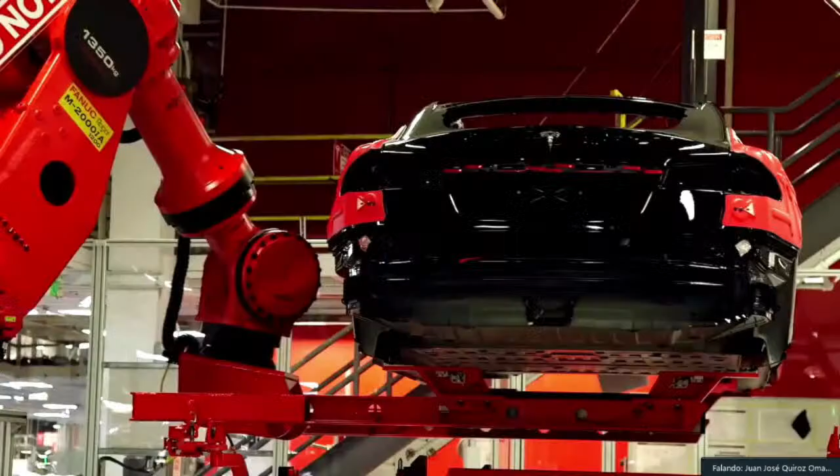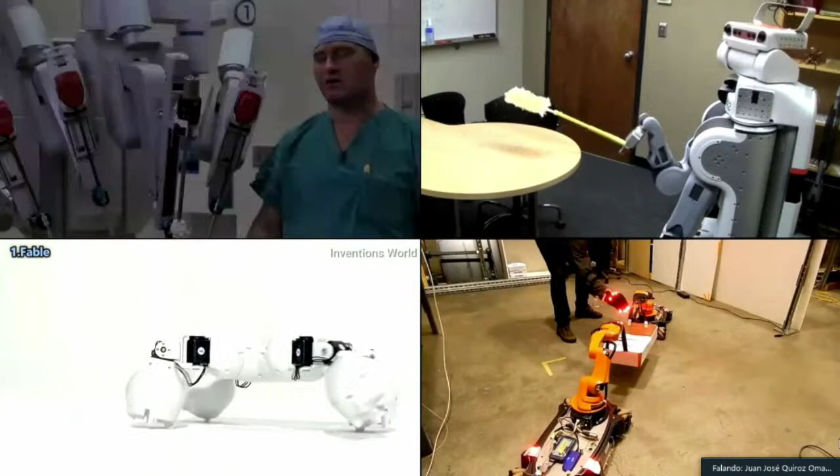Industrial robots have been one of the main focuses of robotics, historically speaking. In these environments, tasks are often repetitive in controlled spaces. However, in recent decades, the field of robotics has experienced great growth in various fields of knowledge. New applications have emerged in educational and medical fields, also in collaborative applications and home environments.

This new paradigm brought new challenges and robots like humanoid robots, which are designed to perform manipulation in human environments. They often have a large number of degrees of freedom, which allows them to increase their dexterity and possibility of movement.

To control humanoid robots it is required to make contacts with the environment sequentially under several constraints, such as maintaining the robot balance, preventing violation of the joint limits, avoiding collisions with the environment, etc.

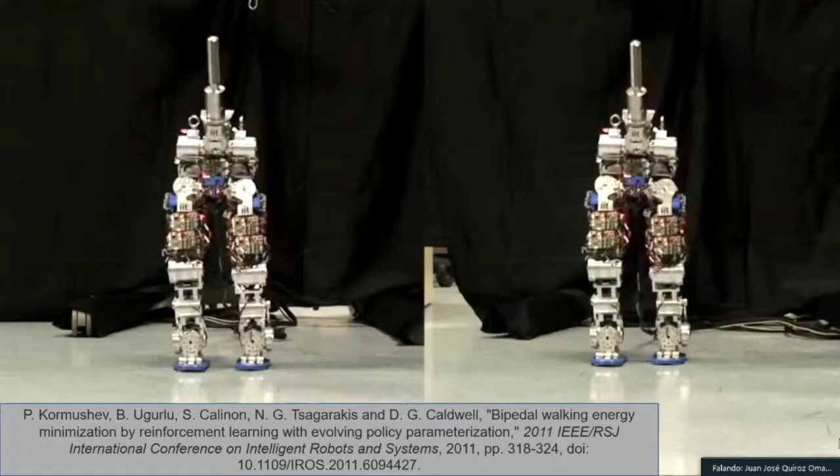These contacts can be cyclic or acyclic depending on whether they are periodic or not. Cyclic contacts have been used mainly for gait tasks and known environments where contacts are made on flat or slightly uneven surfaces.

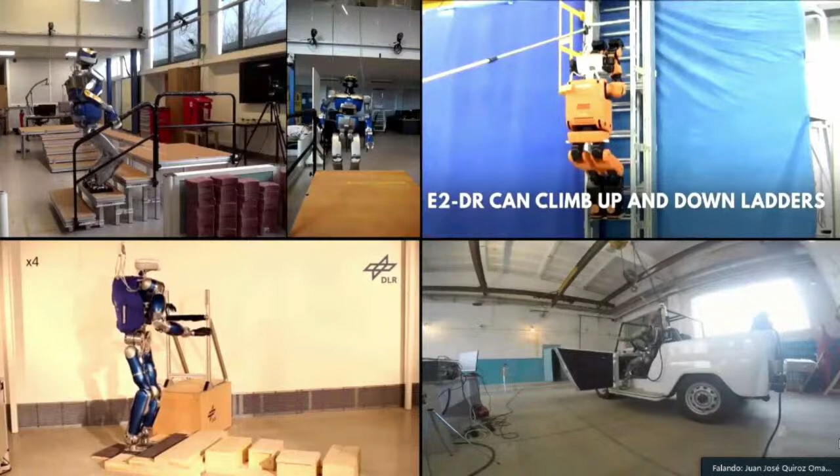Aiming to perform more sophisticated tasks in cluttered environments or to increase the robot's reachability, multi-contact control has been gaining the attention of researchers in recent years. In this paradigm, acyclic contacts are more suitable as they allow for richer movement options according to the environment.

The objective of this PhD dissertation is to develop whole body motion control strategies for humanoid robots with self-collision avoidance and using multi-contacts with the environment.

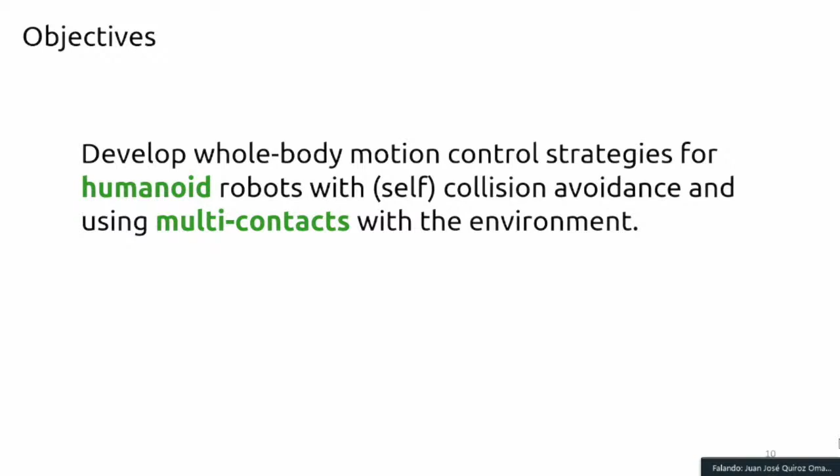Multi-contacts can be useful to perform manipulation tasks. For instance, consider a humanoid robot trying to grab a cup. The robot must keep the projection of its center of mass inside the support polygon in order to ensure robot balance. In this case, the robot's reachability is limited and the robot fails.

Alternatively, the robot can perform a contact with the table, which increases the support polygon and allows the fulfillment of the task. The specific objectives are the following.

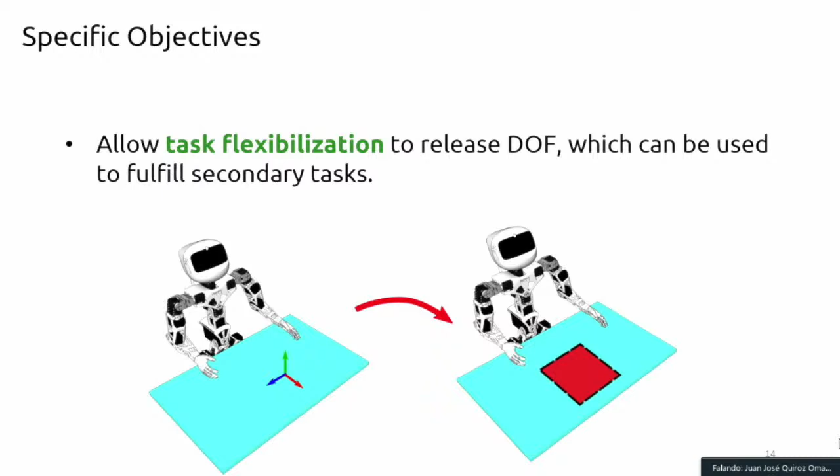Define a suitable objective function in order to perform whole body control at second-order kinematics. Develop suitable constraints in order to ensure self-collision avoidance. Allow task flexibilization to release degrees of freedom, which can be used to fulfill secondary tasks. Develop suitable constraints to perform multi-contact applications and general manipulation tasks.

Exploit the vector fields inequality framework to impose constraints to ensure balance tasks and contact forces with other robot parts, namely the hands. And finally, validate the proposed techniques on simulation and on the real platform available in our research group, MACRO.

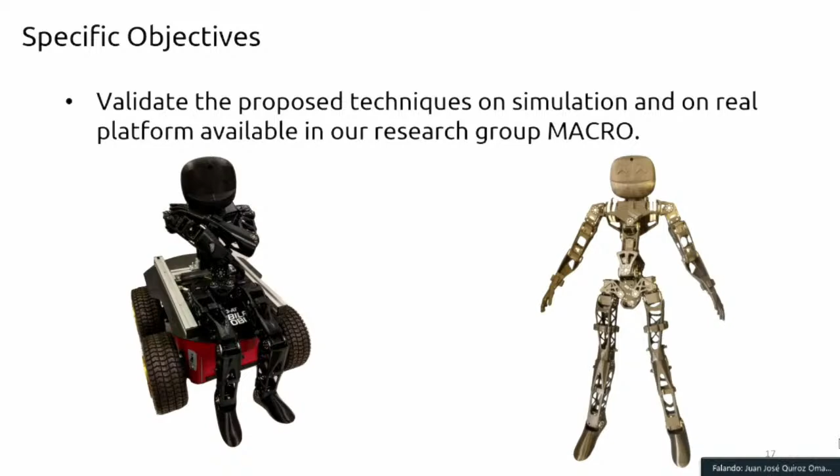The acyclic contact planning paradigm requires computing the robot base trajectory, planning a sequence of configurations that respect the set of constraints along the base trajectory, and interpolating a continuous motion between two configurations. However, dealing with those problems at the same time can lead to a combinatorial explosion.

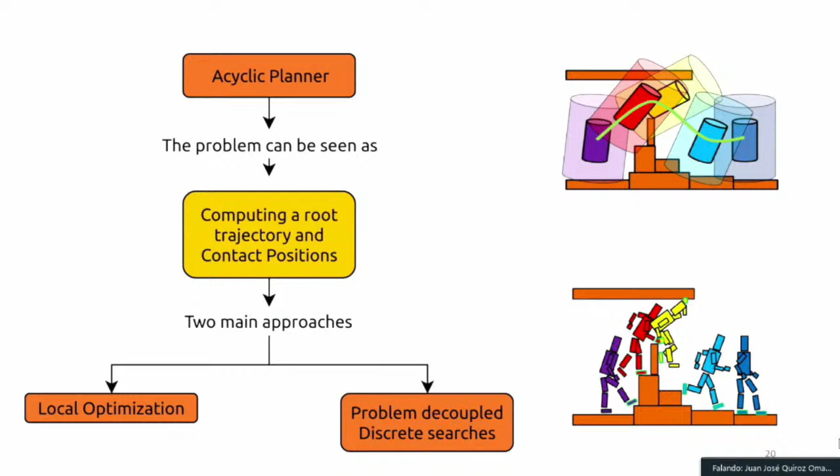This problem has been addressed basically in two ways: using discrete searches, which usually are based on probabilistic algorithms and aim for global convergence at the expense of higher computational costs. To mitigate this, local optimization has been used to reduce computation costs, but at the expense of local convergence.

Some works used optimization strategies to perform acyclic motions. Mordatch et al. proposed the contact invariant optimization method to perform simultaneous optimization of the contacts and task motions.

Lengagne et al. addressed the dynamic multi-contact motion generation by using nonlinear optimization and considering the full body dynamic model. Unlike the Mordatch work, this method requires the desired contact sequence.

Saab et al. used hierarchical quadratic programming to handle dynamic motion under unilateral constraints. The authors proposed a reduced formulation for rigid planar contacts.

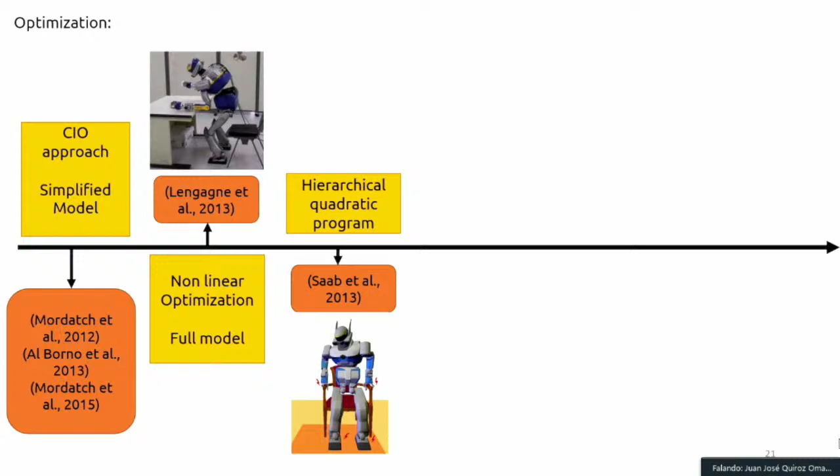Chung and Khatib addressed multi-contact locomotion using the elastic strips framework. A global planner searches a sequence of contact regions based on the robot's reachability. After that, a prioritized controller simultaneously adjusts the poses and the contact regions.

Deits and Tedrake addressed contact planning for cyclic gaits using mixed integer programming. In this case, a set of convex obstacle-free configuration space regions are pre-computed, and integer variables are used to assign footsteps to those regions.

Ponton et al. extended the strategy to multi-contacts using a reduced model of the robot. However, strategies based on mixed integer programming are still computationally expensive.

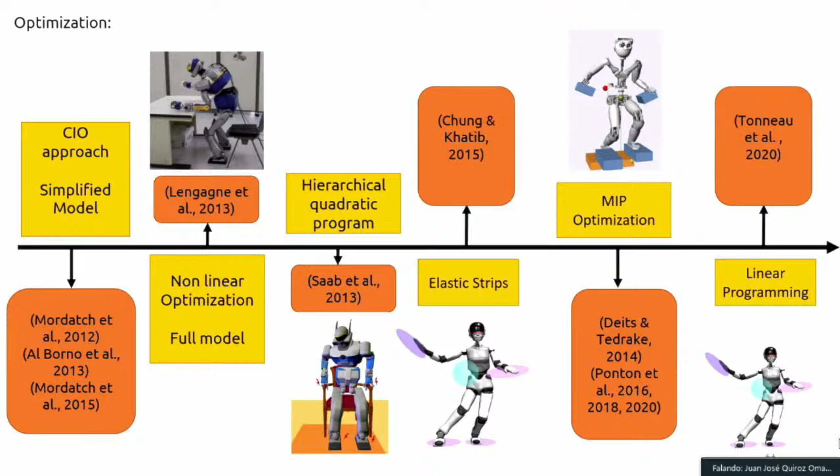To mitigate this, Tonneau et al. formulated the mixed integer programming contact planning by means of linear programming. This allows taking advantage of a sparse solution at the expense of optimality approximations.

Collision avoidance is a fundamental requirement in robot applications. This topic has been addressed using offline or online approaches. Offline approaches are usually based on motion planning, where probabilistic methods have been widely used. However, these strategies are computationally expensive and suitable only in known scenarios. Reactive methods usually require less computation time and are suitable for application within unknown workspaces.

Collision avoidance usually has been handled using the task priority framework, where the overall task is divided into subtasks with different priorities. However, this strategy does not ensure the fulfillment of the lower priority tasks. Furthermore, dynamic prioritization, which consists in changing task priorities, has an exponential cost in the number of inequalities.

Alternatively, non-hierarchical formulations based on weighted least square solutions have been used. However, those approaches require an appropriate weighting matrix, which may not work in general, especially for high-speed motions. Other strategies address collision avoidance explicitly by using mathematical programming, which allows dealing with inequality constraints directly in the optimization formulations.

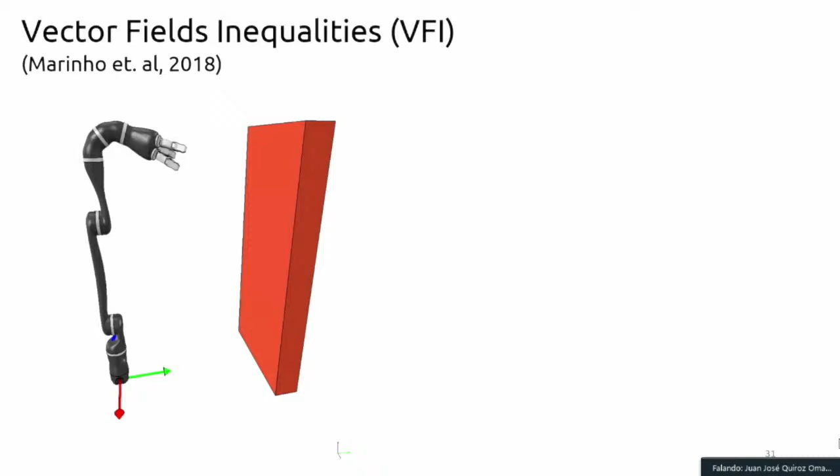The vector field inequalities are differential unilateral constraints which are useful to prevent collisions between geometric primitives. For instance, consider a robot manipulator. We want to prevent the collision between the end effector and this wall. In this case, the vector field inequalities constrain the approach velocity without affecting the tangential velocities.

In this framework, we require a signed continuous distance function between two geometric primitives. Furthermore, we require the time derivative of the distance function, which is composed of the distance Jacobian, the joint velocities, and a term which is called the residual. The residual contains information unrelated to the robot kinematics.

Then we define an error distance to define safe regions. The goal is to constrain these distance dynamics.

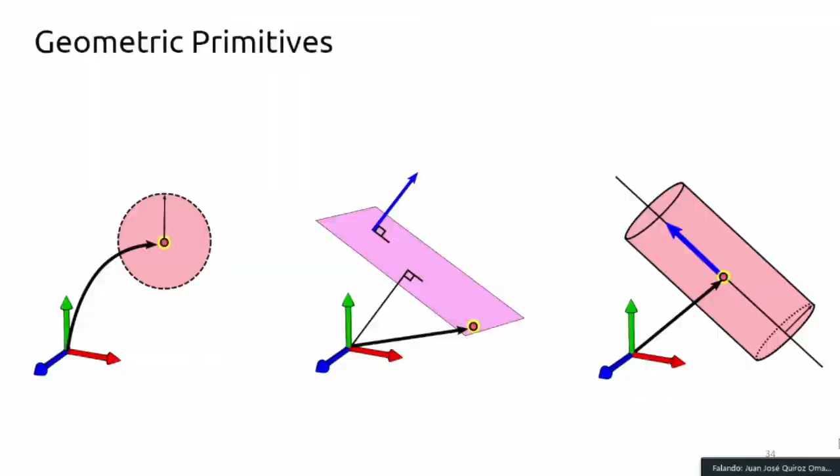The vector field inequality framework works with geometric primitives like points, which using an associated radius represent spheres, and lines, with an associated radius, represent infinite cylinders. For instance, planes are useful to model walls or tables and avoid collision with them.

Lines, for instance, has been used in surgical applications to prevent collisions between two robots.

The main contributions of this work are the following. Extend the vector fields inequality method, which was first proposed using first-order kinematics, to use second-order kinematics. This enabled application that uses the robot dynamics. Propose a new distance function related to the angle between two lines and the corresponding Jacobian matrix. This is useful to prevent violation of joint limits or avoid undesired end-effector orientations.

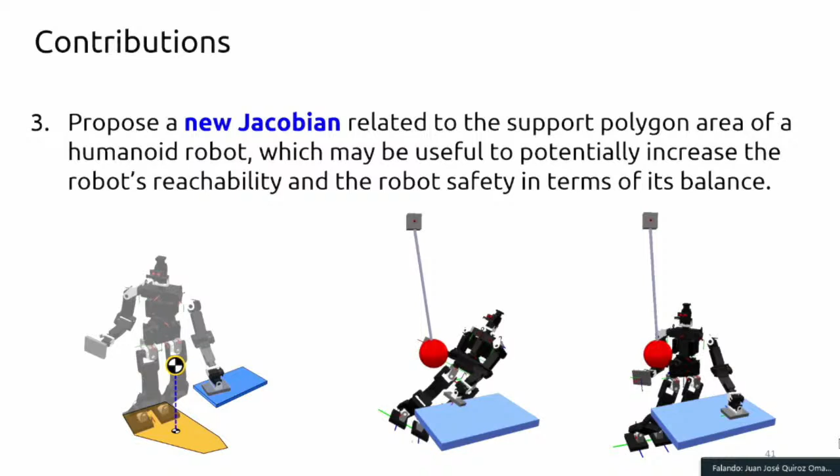Propose a new Jacobian related to the support polygon area of a humanoid robot, which may be useful to potentially increase the robot's reachability and the robot's safety in terms of its balance.

Rewrite the formulation of the Gauss principle of least constraints using dual quaternion algebra. This allows a more compact and unified representation. The idea is to perform whole body control in the context of multi-contact application, manipulation tasks, and cooperative manipulations in robots commanded by joint torques.

A quadratic program generates the control inputs subject to constraints, as for instance, the vector fields inequalities. And then using the joint acceleration, we compute the joint torques by means of the Euler-Lagrange equation in this way. So how to apply the vector fields inequality framework to the acceleration level?

This work proposes the second order vector fields inequalities. The same idea can be applied here. By using a vector field, the approach acceleration is limited as a function of both the velocity and the distance.

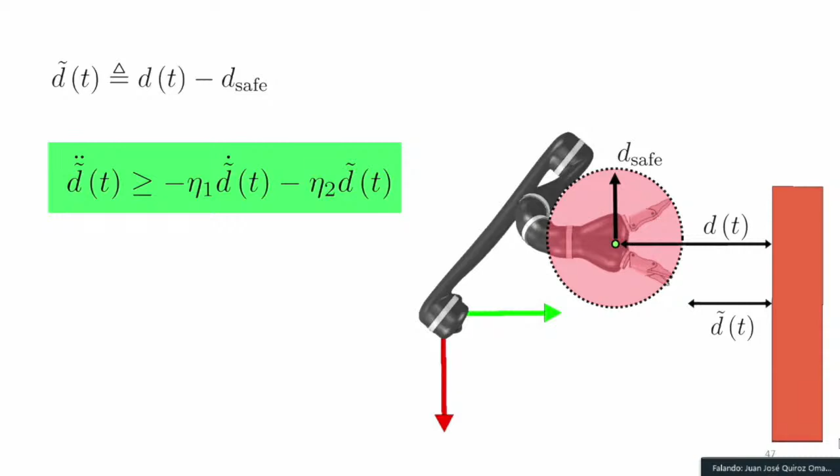For example, consider a robot manipulator that performs a task in the presence of an obstacle. We define a restricted spherical region using a safe distance, and the obstacle must be kept outside the restricted region.

Then we compute the time derivatives of the error distance, which can be written in this way, where this term is composed of the safe residual, which contains the residuals and the time derivative of the safe distance. By taking the second time derivative of the error distance, we obtain these three elements, which can be used to...

Rewrite the second order vector fields inequalities in this way, and explicitly as a function of the joint accelerations in this way, where this term contains the information about the robot kinematics, and this one, which is called the residual beta, contains the information about the time derivative of the safe distance and the residual. This is the information unrelated to the robot kinematics.

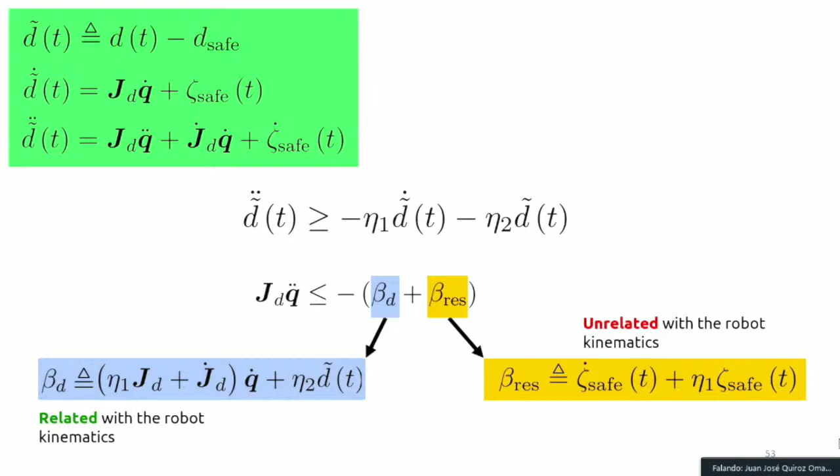In case where the object is static and the safe distance is a constant, this term, the residual beta, equals 0, and the constraint is written in this way.

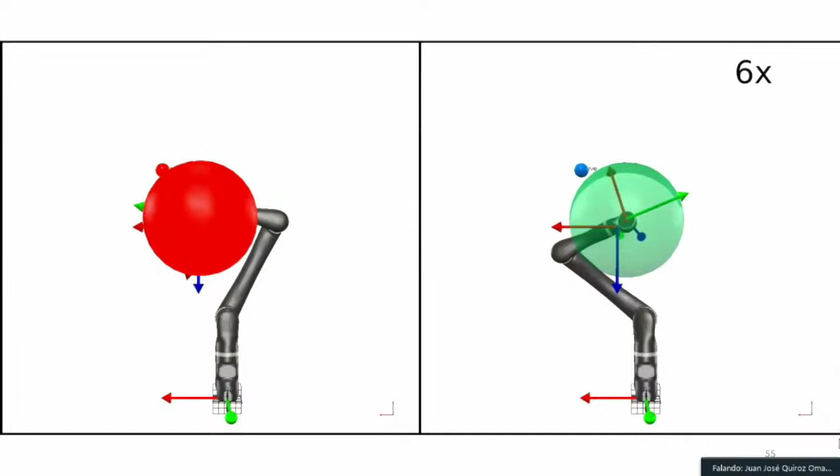This is a simulation of a robot commanded by joint torques performing a task of controlling the end-effector position. The obstacle is static and the safe distance is a constant. On the left, the constraint is disabled, and on the right, the constraint is enabled. When the constraint is enabled, the robot prevents the collision with the object as expected.

To illustrate the effects of a dynamic object, this example shows three cases. In case 1, the constraint is disabled, which means that the robot will ignore the obstacle. In case 2, the constraint is enabled, but the robot considers the obstacle as a static object. This means that the robot takes into account the object, but both the velocity and the acceleration of the object are neglected. This is simulated considering the residual beta as 0.

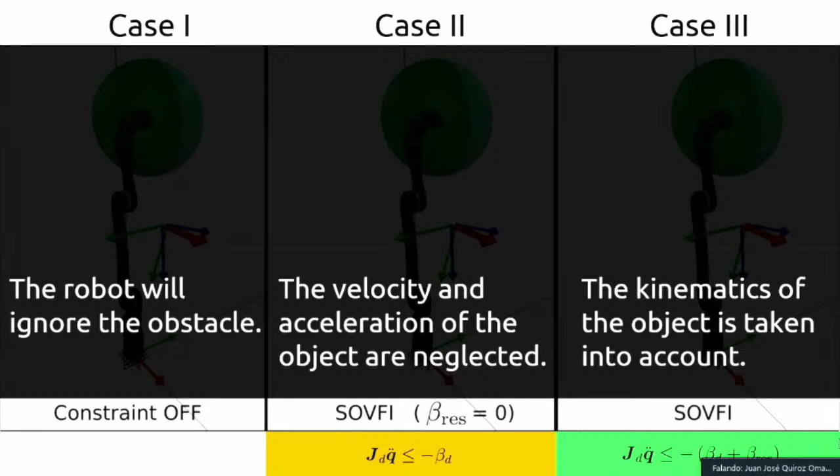Finally, case 3 shows the best scenario in terms of collision avoidance. The constraint is enabled and the robot knows the kinematics of the object, which is taken into account.

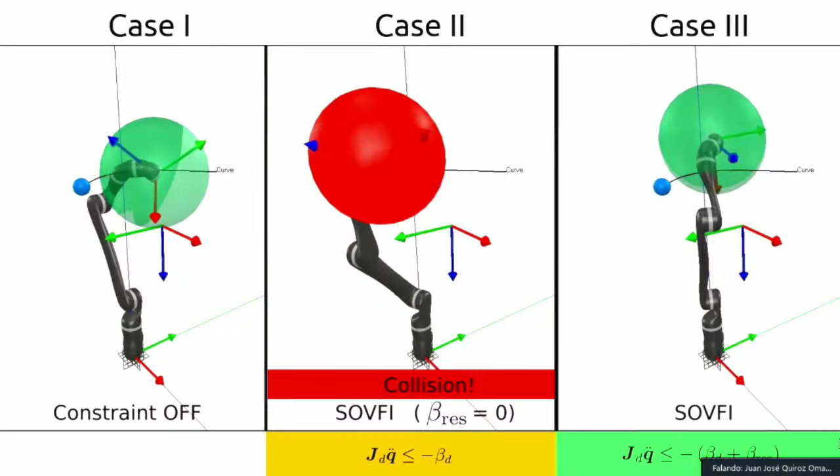In case 1, the robot and the object collide as expected. In case 2, the robot tries to avoid the collision, but the evasive maneuvers are not enough, and both the robot and the object collide as well. In case 3, the robot avoids the collision. This is expected since the robot knows the kinematic information about the object.

The vector fields inequality framework within the dual quaternion algebra uses pairs of geometric primitives to prevent collision between them. For instance, point-to-point or point-to-plane, where the points with an associated radius represent spheres. Or using, for instance, lines associated with a radius to represent infinite cylinders, for instance point-to-point, line-to-line. But how to prevent undesired angles between two lines?

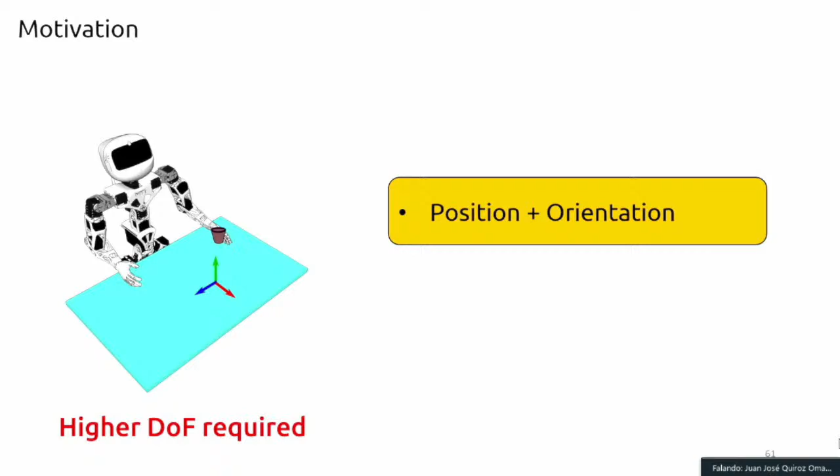The main motivation is to define realistic tasks to release some degrees of freedom of the robot. For instance, a humanoid robot performing a task where it's decided to put a cup on a table, we can define tasks to control both the position and orientation all the time, which requires 6 degrees of freedom.

Alternatively, we can define tasks to minimize the distance between the robot's hand that grabs the cup and the table. In addition, we can use a constraint to keep the orientation of the cup below a threshold.

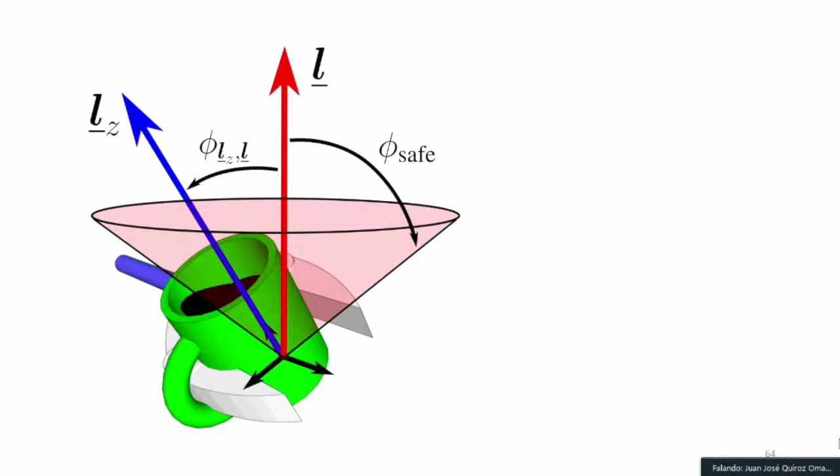So what is the idea? Given a line attached to the robot kinematic chain and an independent line, we want to constrain with a maximum angle between the lines to avoid undesired end-effector orientation or to prevent violation of the joint limits.

This work proposes a function to control the distance between the orientations of the lines. The distance function f is bijective, and therefore controlling that distance function is equivalent to controlling the angle in the interval 0 to pi.

Using the law of cosines, the function is given by this expression. Furthermore, its time derivative is computed as a function of the joint velocities by means of the line-to-line angle Jacobian and the line angle residual. To write this constraint using the vector field inequality framework, we first define the error distance functions in this way, where phi safe represents the maximum angle allowed between the lines.

To first order kinematics, we use the vector field inequality framework, and we can write the constraint in this way, which explicitly in terms of the joint velocities is written by this expression.

Analogously, using the second vector field inequality, we can write the constraint in this way, and explicitly in terms of the joint accelerations in this way.

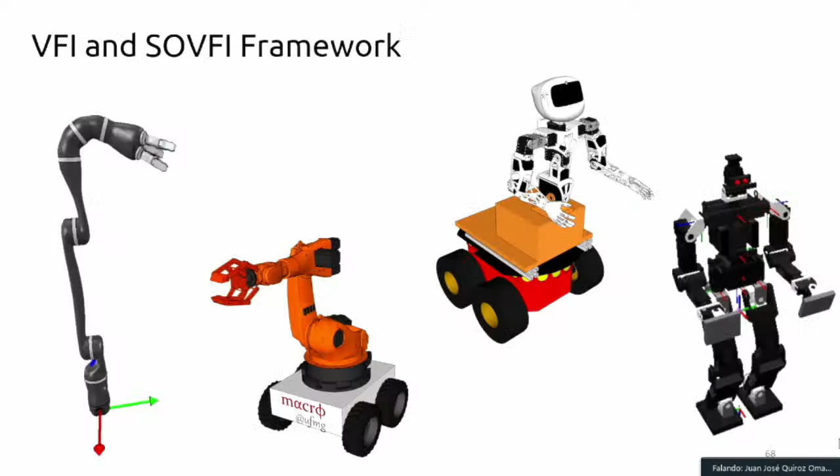The strategy can be applied to different robot platforms, for instance, robot manipulators, mobile manipulators, cooperative manipulators, and of course, humanoid robots. In the context of humanoid robots, we can use the vector field inequalities to take into account additional constraints, such as the ones that ensure robot balance, while taking into account multi-contact tasks.

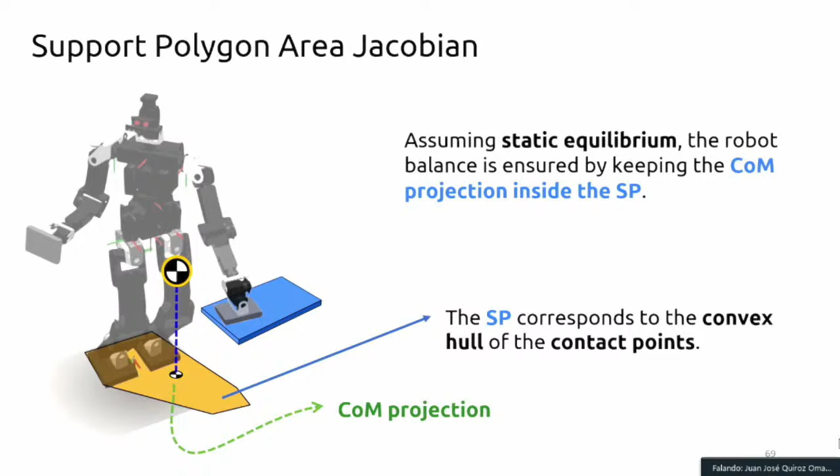Consider, for instance, a humanoid robot performing a contact with a table. Assuming a static equilibrium, the robot balance is ensured by keeping the center of mass projection inside a region called the support polygon. This work proposes a support polygon area Jacobian that can be used to maximize the area of the support polygon.

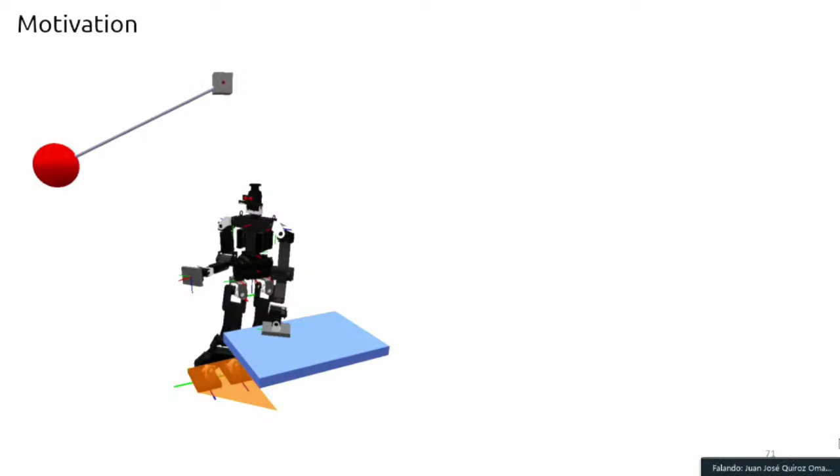Likewise, a larger support polygon area could improve the robot's balance in the presence of external disturbance. Consider a robot in a multi-contact configuration where a pendulum is placed to simulate an external disturbance. On the right, we have the same robot with a larger support polygon. In this specific example, the robot with a larger support polygon keeps its balance after the collisions.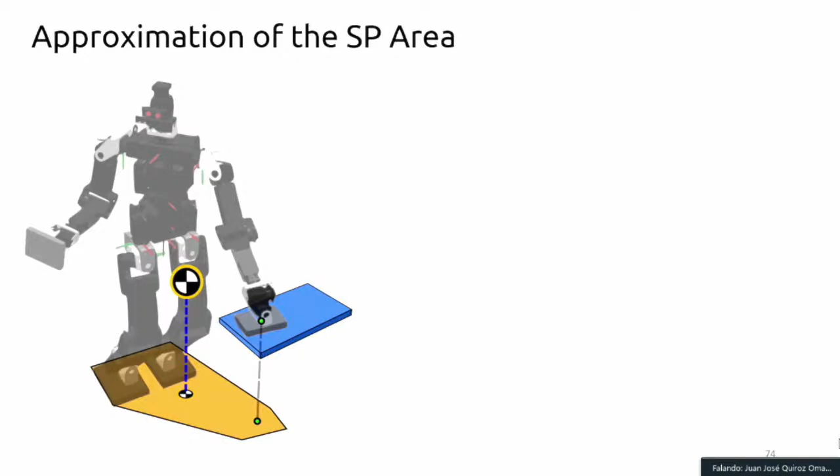So, how to maximize the support polygon? Considering a case where the robot is in a multi-contact configuration using both feet and one hand, this work proposes an approximation of the support polygon to simplify the computation of the Jacobian. We assume static equilibrium, fixed feet, rigid planar contacts, and enough friction forces to keep the contact fixed.

Then we select a contact point of the robot hand to build an approximation of the support polygon, which in this case is called SPA, such that the SPA polygon is inside the support polygon. The approximation of the support polygon is composed of the convex hull of the points PA, PB, PC, and PD. The goal is to compute the relation between the joint velocities and the time derivative of the area.

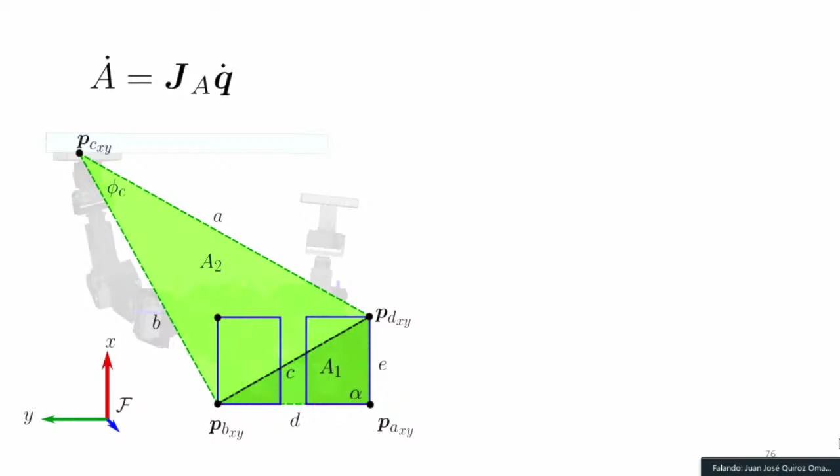The area is composed of the area of two triangles and is given by this expression. Since both feet are fixed, the time derivative of the area is a function of the velocity of the point PC, which is related to the joint velocities by means of the position Jacobian of the points on the plane. Using that relation, we find the area Jacobian.

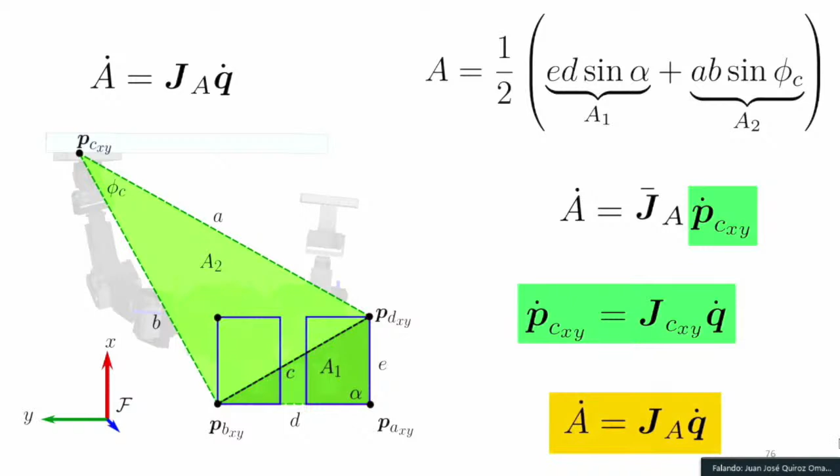We can use both the vector field inequality framework and the support polygon area Jacobian to perform manipulation tasks. Consider a task to touch the ball using the right hand. The robot tries, and suppose that it fails.

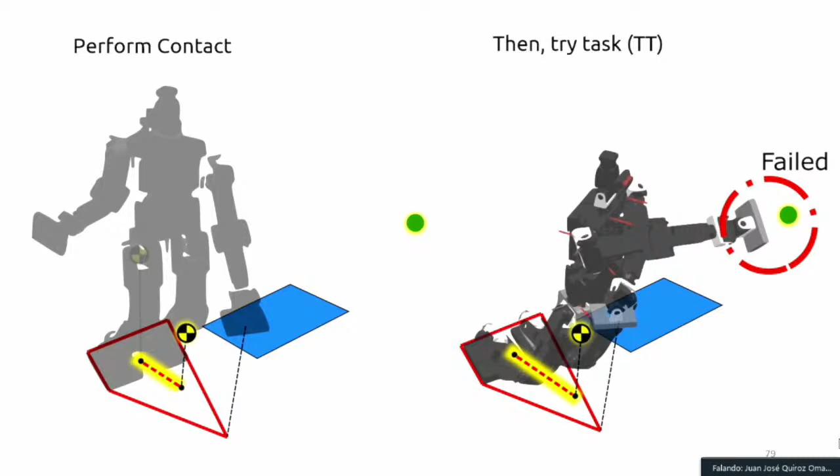Then we can perform a contact with the table after trying the main task of touching the ball, for instance, in this way. Suppose the robot fails; we can perform maximization of the support polygon after performing the contact with the table and after trying the main task in this way.

In some cases, after the maximization of the area, the robot could fail. Then, in these cases, we can relax the hand constraint. For instance, we change the constraint that keeps the robot hand fixed to a sliding contact. This allows a sliding contact, whereas the robot tries to reach the ball simultaneously.

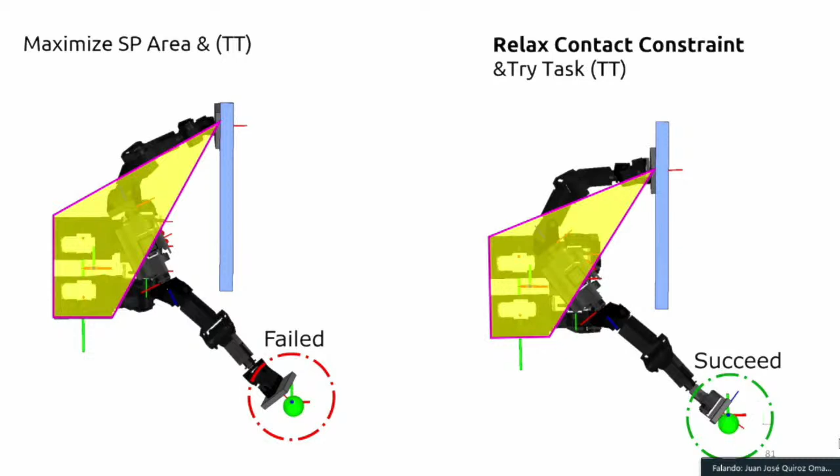Once we compute the control inputs using quadratic programming and the vector field inequalities, we can use the Euler-Lagrange equations to obtain the torques. In the overall strategy, we use dual quaternion algebra to model both the robot and the geometric primitives. Therefore, that raises the question: how to describe the robot dynamics using dual quaternions?

This work rewrites the Gauss principle of least constraint using tools from dual quaternion algebra. The Gauss principle is a differential variational principle equivalent to the Newton-Euler one, based on the variation of the acceleration, and can be stated as a minimization of a scalar quadratic function in terms of the accelerations.

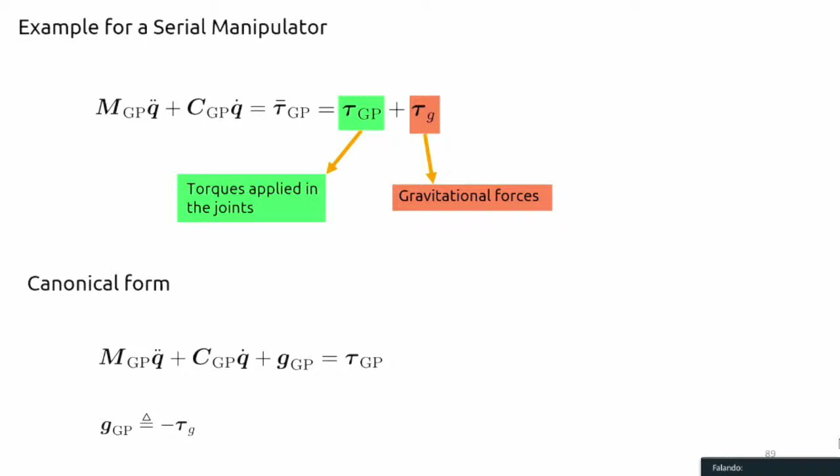Furthermore, our algorithm based on dual quaternions, unlike the classic strategies, works for any type of joint. Because of that, our method is computationally more expensive.

To validate the conic constraint and the second order vector field inequalities, we performed simulation experiments. Furthermore, to illustrate the multi-contact strategy, the support polygon, and the support polygon area Jacobian, we performed a realistic simulation of the setup.

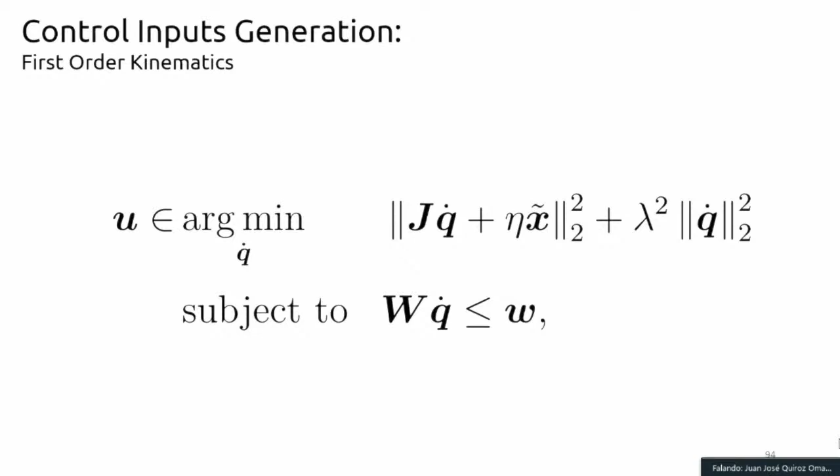We use the following quadratic program to generate the control inputs. This is the task Jacobian. This one corresponds to the task error. This is the damping factor, which is used to minimize the joint velocities. And this one represents the linear constraints.

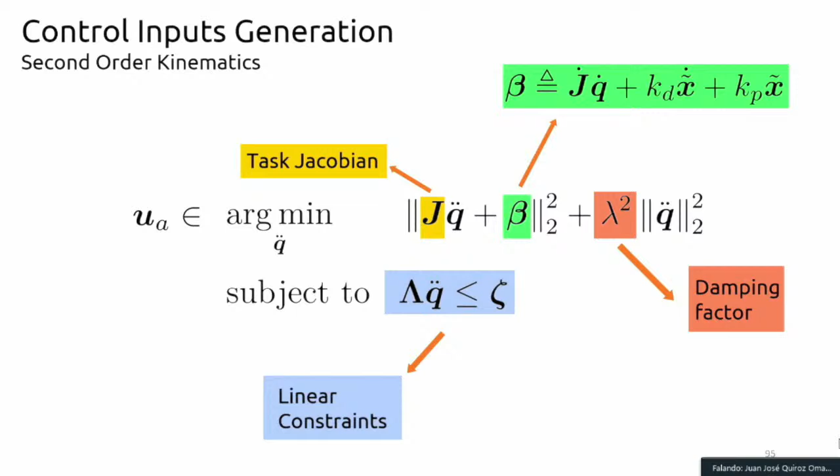We use V-REP and MATLAB for the simulation, and DQ Robotics for both robot modeling and the description of the geometric primitives.

The robot kinematic chain is composed of a 5 degrees of freedom torso and a 4 degrees of freedom left arm, which has a total of 9 degrees of freedom.

The goal is to put the cup on a table while keeping the cup tilting below a threshold. To accomplish this task, the control law minimizes the distance between the left hand and the table.

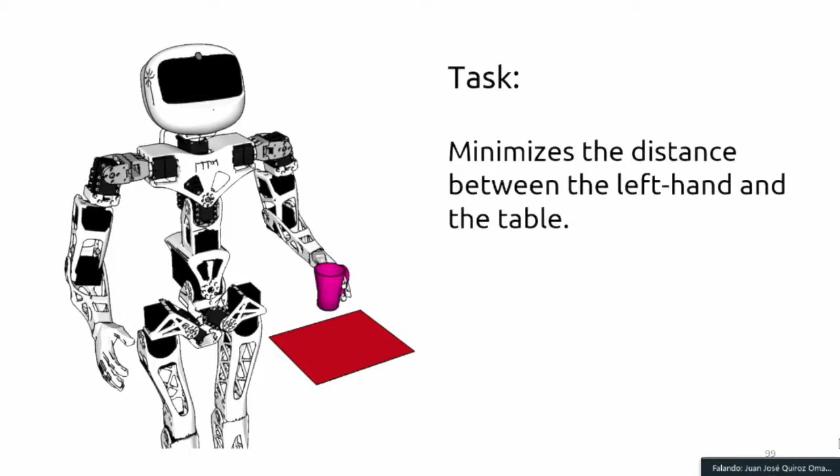We use 4 plane constraints to define the target region. Furthermore, we use 10 conic constraints: one of them is to keep the cup tilting below a threshold, and 9 of them are used to prevent violation of the joint limits.

We performed a second simulation using second order kinematics with the same task specification. We use quadratic programming to generate the control inputs, and in this case, we compute the torques using the Gauss principle, the Euler-Lagrange equation based on the Gauss principle of least constraint and dual quaternion algebra.

In both cases, the task error is minimized, and therefore the end effector reaches the target zone. But only the constrained case does not violate the cup tilt angle constraint and the joint limits, as expected.

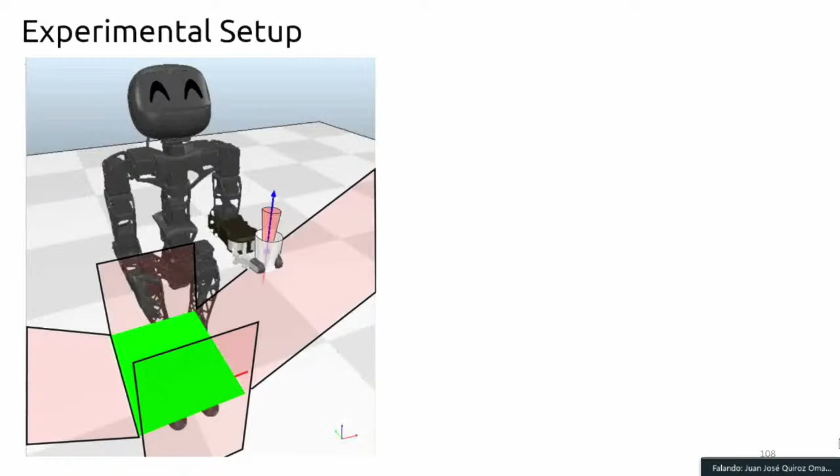We performed a real experiment using the platform composed of the upper body of the Poppy humanoid robot. We used Python and ROS and the quadprog solver.

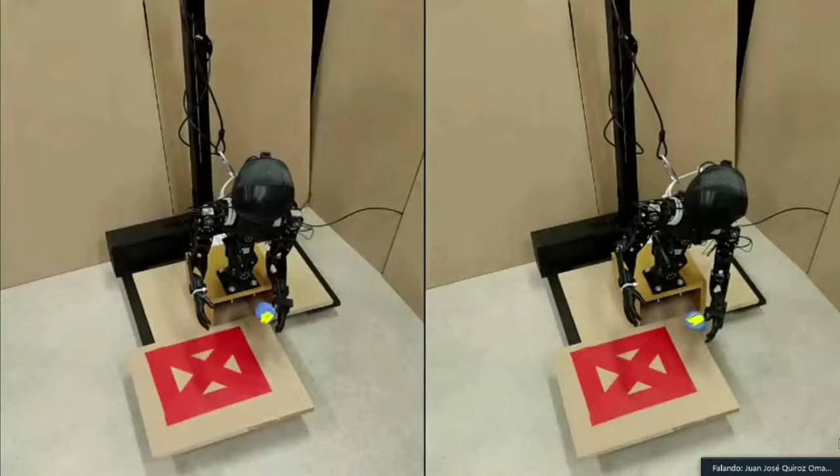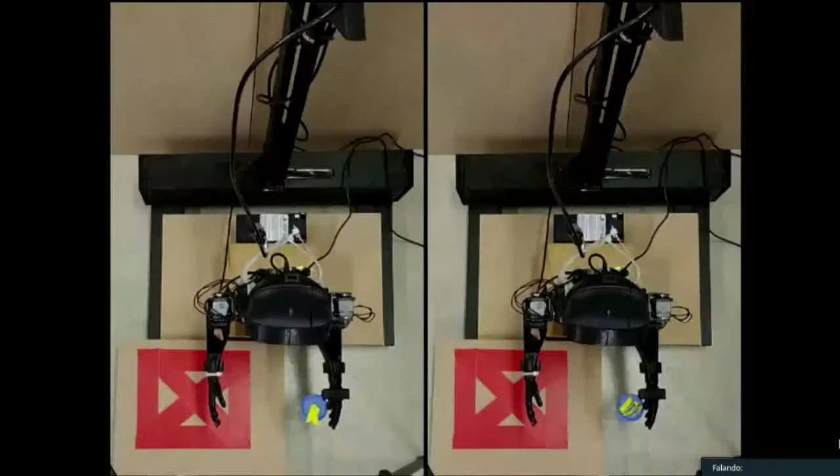We can see that in both cases, the robot minimizes the distance between the left hand and the target zone, which is composed by this red square, but only on the right, the robot respects the maximum angle orientation of the hand. We repeat the experiment

using the same robot platform, but in this way, instead of using one arm, we use both arms. To accomplish this task, we use the cooperative dual task space framework.

In this framework, all kinematics is represented by two variables, namely the relative pose and the absolute pose. The relative pose represents the pose of one arm with respect to the other, and the absolute pose represents the pose of a frame located at the middle of the arms.

In this case, the robot is composed of 13 degrees of freedom, and we can define a task to control the relative pose, which requires 6 degrees of freedom, and to control the absolute pose, which requires an additional 6 degrees of freedom. Alternatively, we can define a task using 7 degrees of freedom.

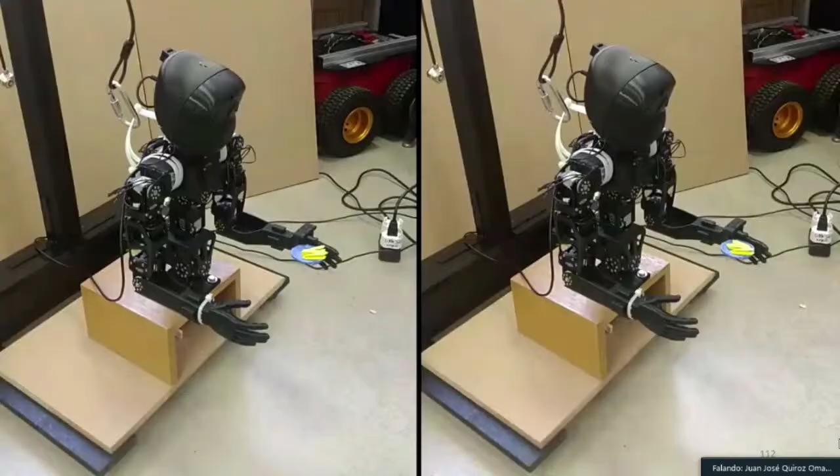6 degrees of freedom are used to control the relative pose, and 1 degree of freedom is used to control the absolute distance. So in this case, the absolute frame is located at the middle of the arms, and the goal is to minimize the distance of that frame with a target plane.

Here on the right is imposed the tilt constraint of the robot. In both cases, the control minimizes the distance, but only on the right, the robot respects the maximum angle orientation.

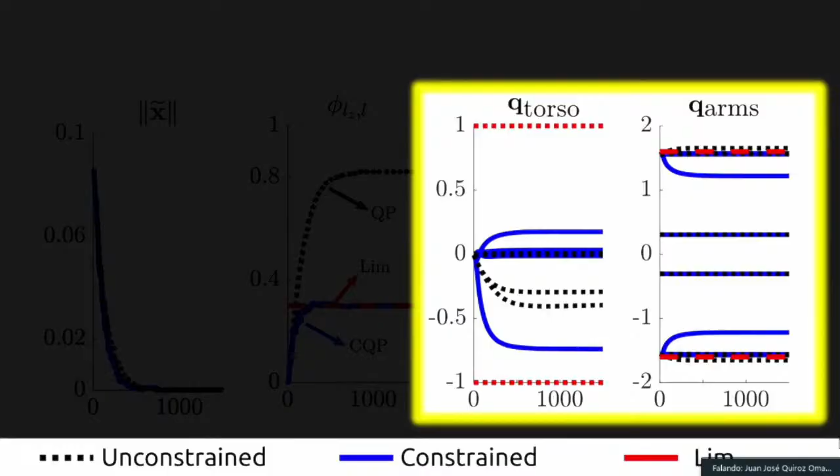We repeated the experiment, but in this case, using a non-holonomic platform serially coupled to the upper body of the Poppy humanoid robot. But in this case, the conic constraints are used to prevent violation of the joint limits.

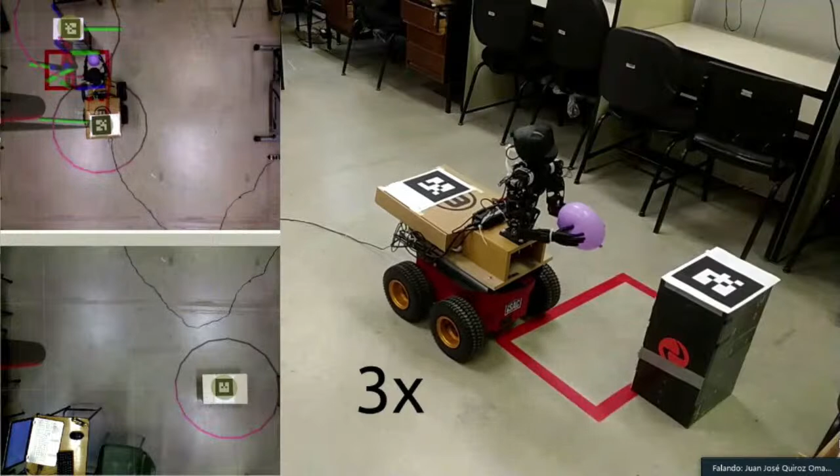Here we have the results. Both controllers minimize the distance, the task error, which is expected, and only in the constrained case does the robot respect the constraints. The small violations of the joint limits in the constrained case are due to discretization effects and because the movement of the mobile robot excites the inertial parameters.

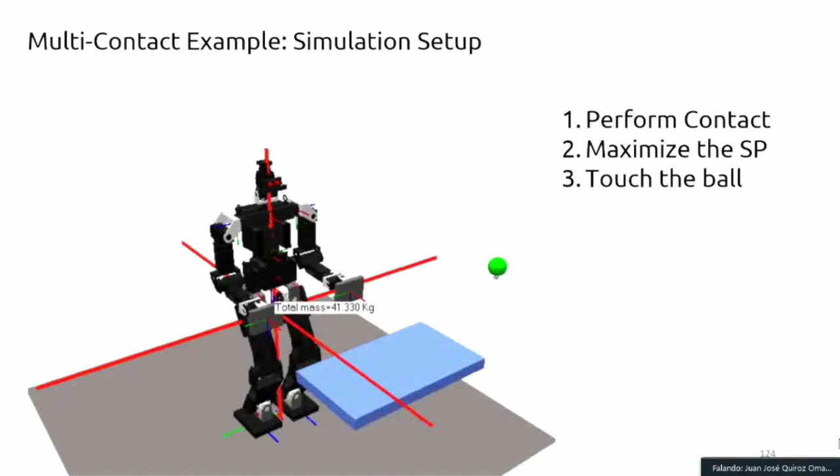We performed a simulation to illustrate the multi-contact strategy. The goal is to control the right hand of a humanoid robot to touch a target ball. In this specific case, we set 3 steps to accomplish the task. First, the robot performs a contact with the table using the left hand. Then the robot performs a maximization of the support polygon. And finally, the robot tries to touch the ball using the right hand.

We use the same strategy to generate the control inputs, but here, of course, we have three different tasks. So in order to accomplish the task of placing the left hand on the table, we define the task error using 2 planes.

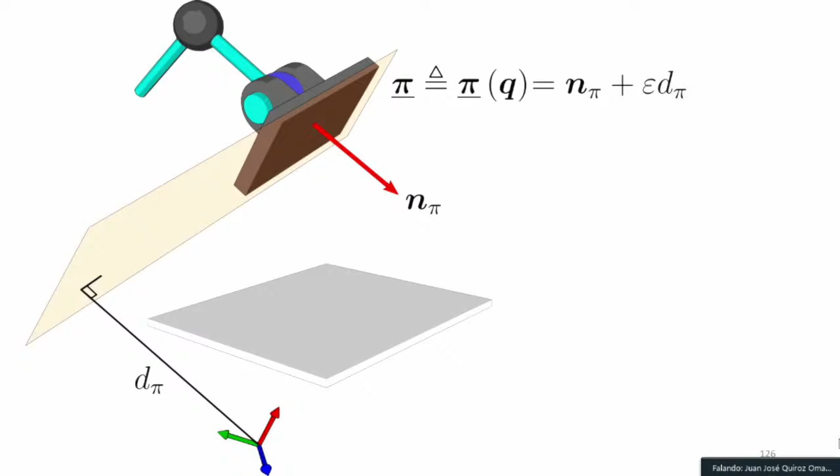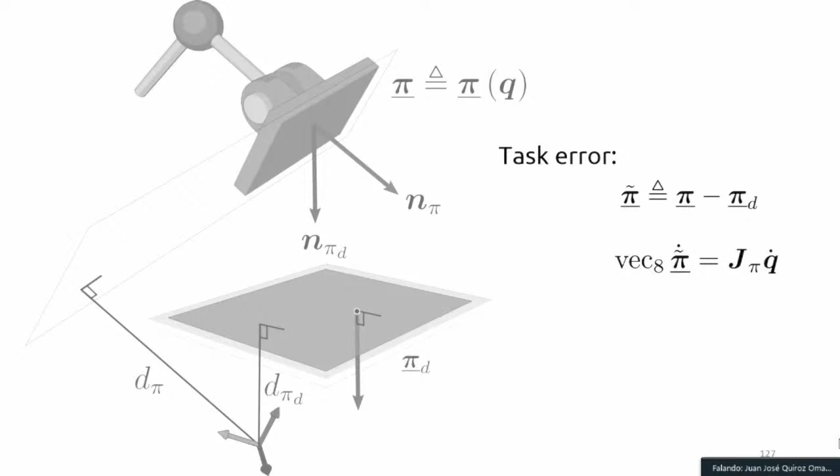First, we attach a plane on the robot hand, which is represented by this dual quaternion, where the primary part represents the orientation of the plane, and the dual part contains the distance between the plane and a reference system. We model the table using a plane as well, a desired plane, and define the task error in this way. To compute the task Jacobian, we take the time derivative of the task error, which is given by this expression, where the task Jacobian is composed of the plane Jacobian that relates the joint velocities with the time derivative of the plane attached to the robot hand.

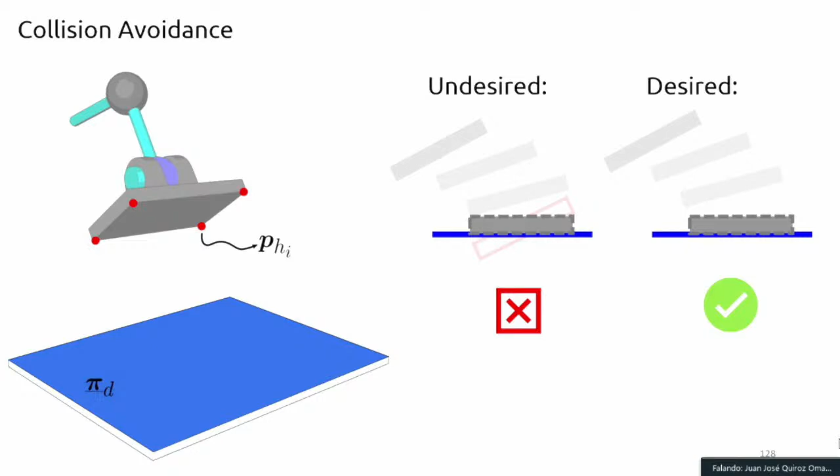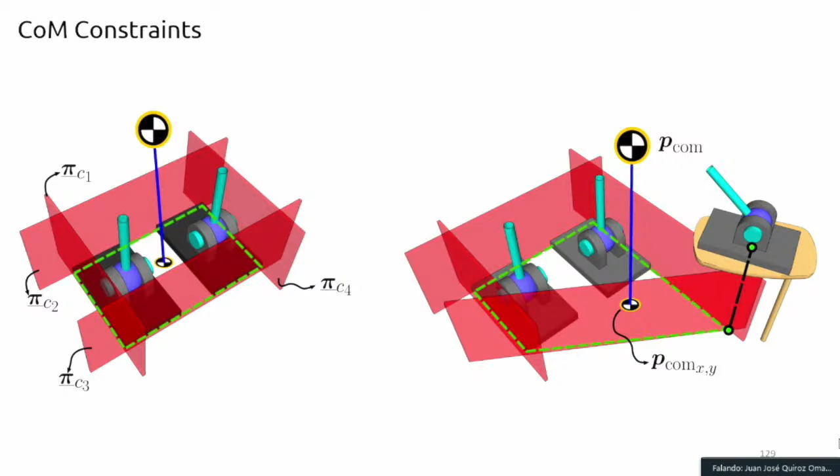To prevent collisions between the end-effector and the table, we use 4 constraints, which in this case are point-to-plane primitives. Furthermore, we use 4 planes to keep the projection of the center of mass of the robot inside the support polygon in this way. To keep the robot hand fixed or to enable a sliding contact, we require additional constraints.

Consider the position and orientation of the robot hand, represented by the unit dual quaternion XC. To ideally keep both the position and orientation fixed, we ensure that its time derivatives equal 0. On the other hand, to allow a sliding contact, we attach a plane on the robot, represented in this case by the dual quaternion PC. Then we ensure that its time derivatives equal 0.

To maximize the support polygon, we define a task error in this way using the area, and the task Jacobian using the area Jacobian. In this case, we use a negative convergence factor. Since the task error dynamics is governed by this equation, in which the solution is given by this exponential function, a negative eta implies an exponential increase of the support polygon. Nonetheless, this growth is limited by the plane constraints that define the target region and the plane constraints that keep the robot center of mass inside the support polygon.

Finally, to touch the ball, the task corresponds to minimizing the squared distance between the robot hand and the ball. The squared distance is used to avoid singularities in the distance Jacobian. The task Jacobian corresponds to the Jacobian matrix that relates the joint velocities with the time derivative of the squared distance.

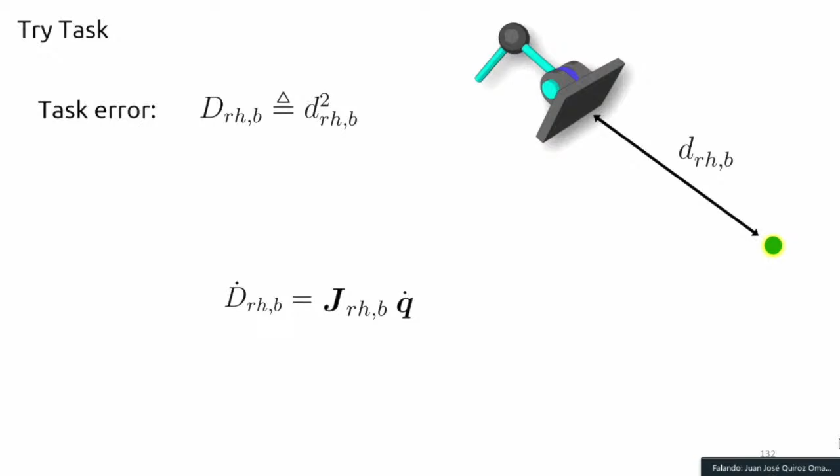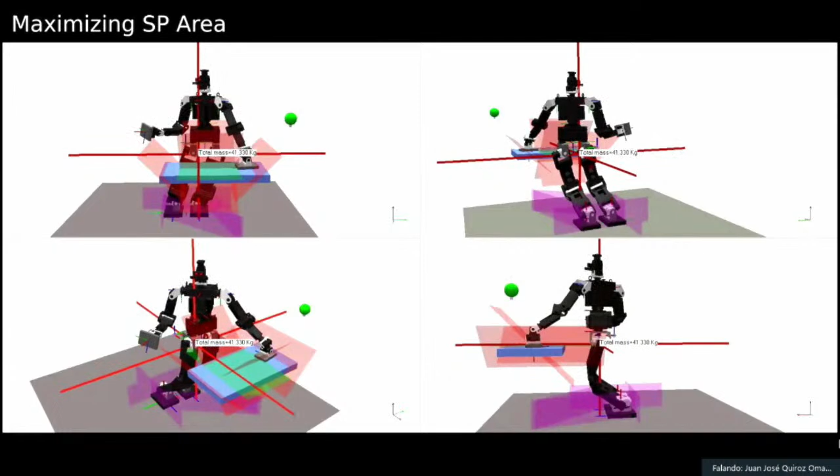Here we have the simulation. First, the robot performs a contact on the table. Then the robot performs a maximization of the support polygon area. And finally, using the right hand, the robot tries to touch the green ball.

In this specific case, the robot succeeds in the task of touching the ball. The maximization of the support polygon area is required in this specific case because if the robot tries to touch the ball without performing the maximization of the support polygon area after the contact with the table, the robot fails to accomplish the task.

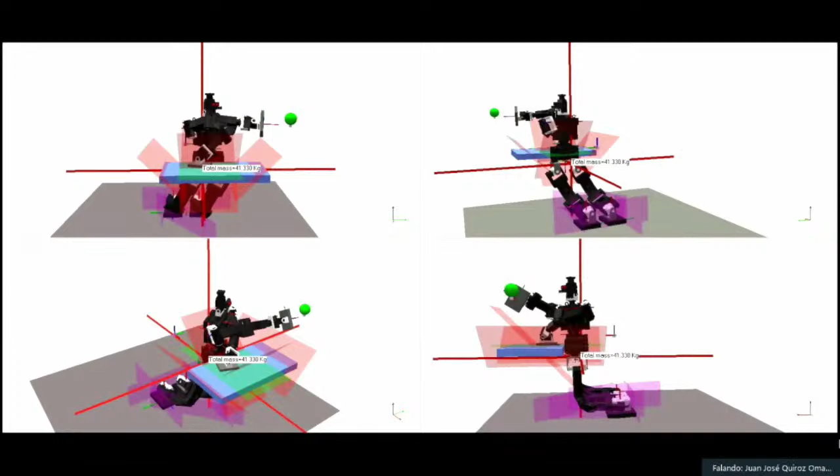Furthermore, the contact with the table is required in this specific case because if the robot tries to touch the ball without performing the contact with the table, the robot fails.

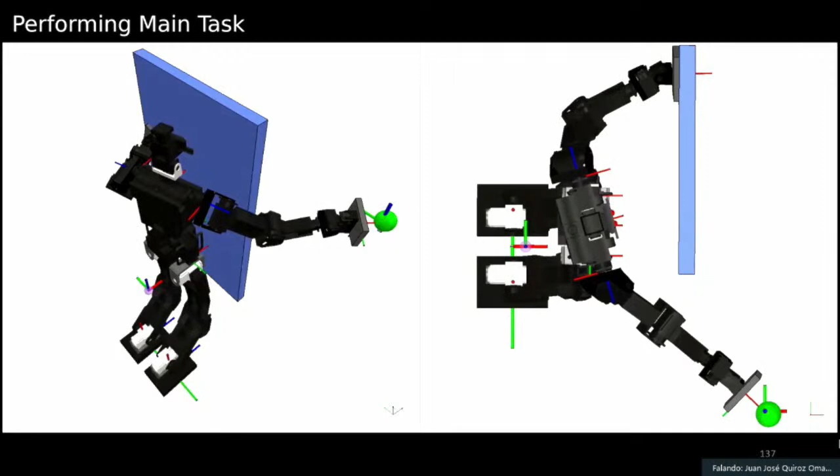We performed a second simulation to illustrate a case where the maximization of the support polygon area prevents the fulfillment of the desired task. In this case, the robot performed the contact, maximized the support polygon area, but the robot fails.

In that case, we can use the last resource, which is to relax the contact constraints of the left hand with the wall and allow a sliding contact to simultaneously minimize the distance between the right hand and the ball, whereas the robot performs a contact with the wall.

But this simulation shows a case where a higher support polygon prevents the fulfillment of the task. This is not surprising because the proposed maximization of the support polygon area does not ensure a better robot reachability.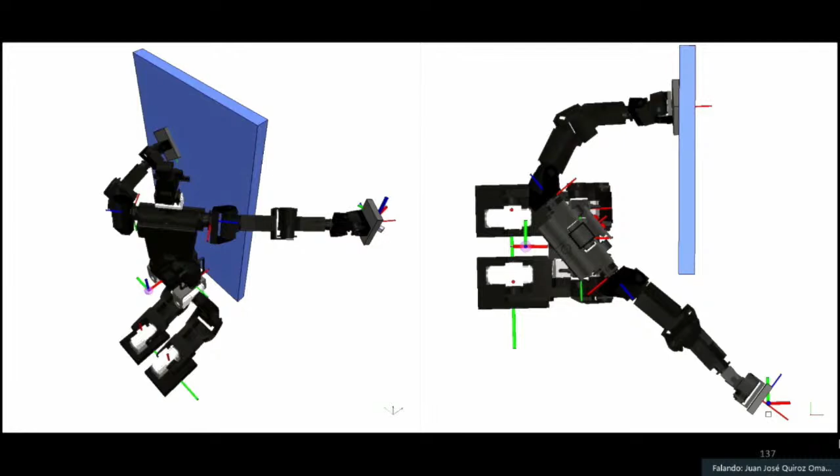To conclude this presentation, this PhD dissertation extended the vector fields inequality framework to second-order kinematics with a formal proof that shows that the strategy ensures collision avoidance.

This work proposed a novel singularity-free conic constraint to limit the angle between two lines. Furthermore, this work proposed a new Jacobian useful to prevent violation of the joint limits or avoid undesired end-effector orientations, and a new Jacobian to maximize the support polygon area, which may be useful to potentially increase the robot's reachability and the robot's safety in terms of its balance, although the proposed maximization strategy does not ensure a better robot reachability.

This work rewrites the formulation of the Gauss principle of least constraints using dual quaternion algebra. This allows a more compact and unified representation. In addition, the formulation based on dual quaternions and the Gauss principle of least constraints allows theoretical connections with other strategies based on dual quaternion algebra developed in our research group.

Furthermore, this work explored connections with other strategies such as the Gibbs, Appell, and Kane's equations. And we explored additional constraints in the Gauss principle of least constraints to model, for instance, non-holonomic robots.

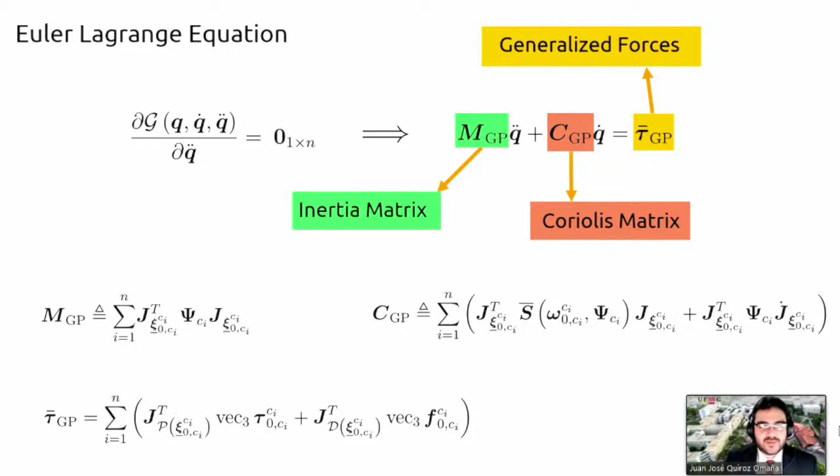But regarding the comments about any type of joint — I don't know if I expressed it the wrong way, but I was comparing the algorithm with strategies where the computational costs were computed specifically for rotational joints, in that specific case. So we compared our strategy using dual quaternions, which works for any type of joint, against two classic strategies whose costs were computed only for rotational joints. Of course those strategies can be extended to any type of joint, but the specific code compared was specified only for rotational joints. That's what I'd like to clarify.

Okay. Then my other question is very simple: do you remember which physics engine you used in the V-REP simulation you presented? What physics engine did you use with V-REP for your simulation?

V-REP has several engines, but we got good results using Vortex. Vortex, okay, so that was my question — I wanted to make sure, because the simulation seemed extremely stable. So I assume yes, you used Vortex.

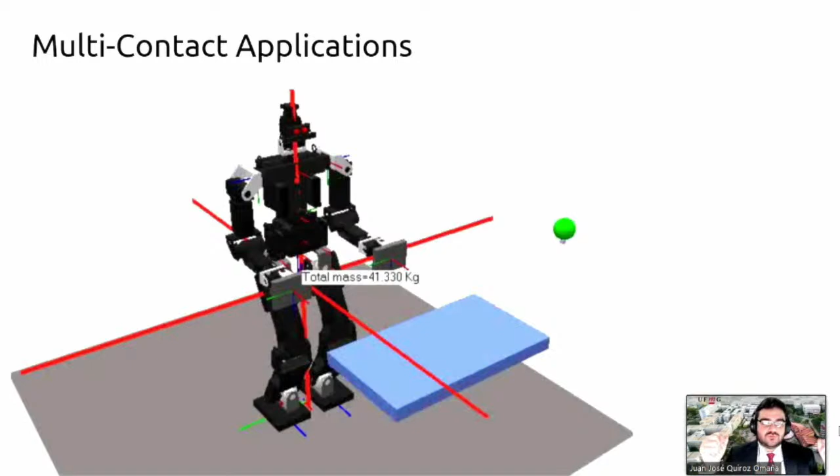Yes, it's to ensure the robot's safety, because the idea is to simulate the robot grasping a plate using both arms. So you need to constrain the relative pose to keep it static in order to manipulate the object, because you could break the robot or the object if you don't control the relative pose between them.

Because I think in your presentation you showed one snapshot that the robot was kind of holding an object with both hands, so that was the reason, right? Exactly, yes. So when I saw this I was like, oh okay, now I get it, because the robot was only holding it with one hand before. But I understand the point. So in fact it would just be the same as holding a bigger object, but you use this one for the experiment, right? Exactly.

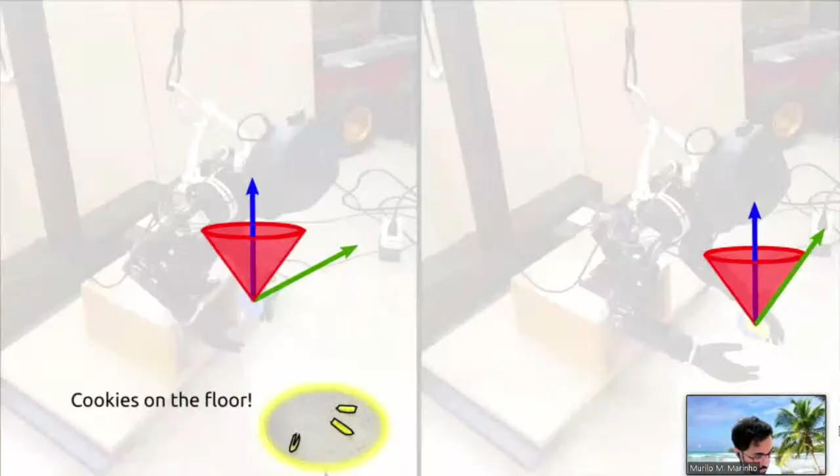Maybe too small of a comment, but just wondering: on page 85, in the beginning of the section, you mention you perform simulations of a 7 degree of freedom robot manipulator implemented on MATLAB, but at the end of the page you mention those things were implemented in Python. So I was just, maybe I misread something, but on page 86 for example you show the computational speed, right? So that was using Python I suppose, because it's super fast. Exactly, yes.

In MATLAB only was the simulation illustrated in figure 6.20 that shows the mean percentage error, implemented on MATLAB. But the computational time, related to figure 6.21, is on Python and the DQ Robotics. So in the first one it's because, like you mentioned in the text, you trust a lot the MATLAB implementation, so you can check it with the state of the art, and for computational speed MATLAB would be too slow, so it would not be fair, so you use Python. Is that correct? Correct.

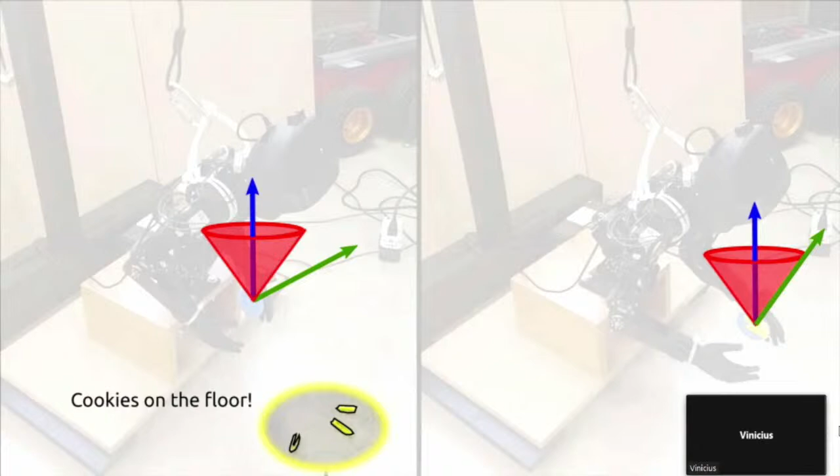Okay, fine, so that's all. I made some comments here, but overall I will repeat that I like a lot your document. I like a lot your presentation and your work overall. I definitely think it's worth a doctoral degree. And I want to congratulate you, and congratulate Bruno. And this is it. Thank you so much.

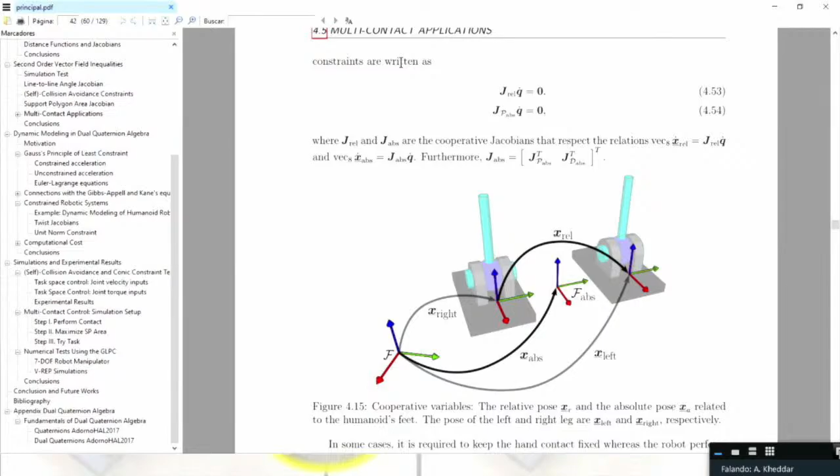I don't know, maybe your problem will just be too much. You will use many decision variables that you have to put constraints between them to link. This reminds me of when we're doing optimization on manifolds, it was better to write everything in the same manifold, instead of doing an equation in one space and another thing in another space. So I think it could be justified by the fact that you are using a specific algebra and specific tools, and you would like all your dynamic equations and kinematics to be coherent inside your controller and the way you formulate your QP control.

Precisely, yes, that's exactly the motivation. What I addressed here was of a more philosophical nature, because we always have this kind of philosophical discussions of which technique is best. I remember François Chaumette hammering me at one of the Journée Nationale de la Robotique Humanoide, because he wasn't convinced why dual quaternions were better than quaternions plus 3D vectors.

At the time I was a PhD student, in my first year, so I was looking at the problem just through the prism of rigid motions. And yes, if you consider just rigid motions, there aren't too many advantages. But then as you mature and get a more mature idea, you see that yes, there are some algebraic advantages, and as you mentioned, the idea is then to have a coherent framework. I just wanted to talk about those points because they are prevalent in what we see, and it's very important to make everything clear in terms of our strategies for doing research.